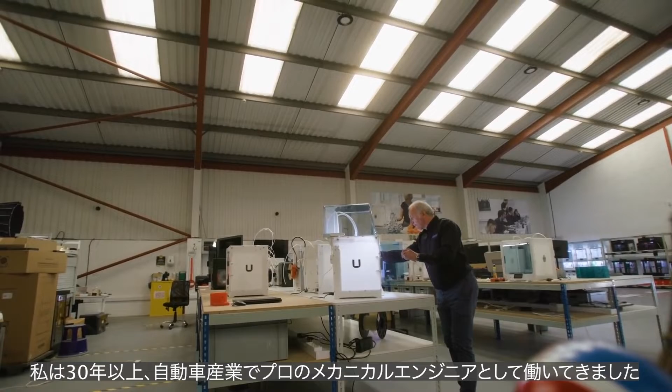Hi, I'm Steve Cox. I have my own company called AMFORi Consulting. My background is I worked as a professional mechanical engineer in the automotive industry for more than 30 years. But for the last 8 years, I've been involved with 3D printing and additive manufacturing. I spend time developing applications, showcasing methods of 3D printing, and helping clients adopt this technology. And one of the things I enjoy the most is exploring what this technology can do and how people can use it.

Ultimaker and the Ultimaker 2 that I bought 8 years ago really started me out on what I've heard called a walk in the woods with additive manufacturing and 3D printing. It still ranks as one of the best decisions I've ever made because it works straight out of the box and it allowed me to concentrate completely on applications rather than just making the technology work. In whatever I do, I'm always striving to achieve the best possible quality output, and I'm sure many of you are the same. But those attributes of quality always stood me in good stead.

So how do you create the best possible quality with the highest level of efficiency and the minimal amount of waste? It's something that I'm always keen to explore in the work that I do with 3D printing because I'm always wanting to present the best possible way of 3D printing to the clients that I work with. So that lean manufacturing mindset completely frames what I do now. I spend a lot of time when I'm designing and setting up 3D prints, and that often means spending time in the preview side of the slicing software to ensure that I know what kind of output I'm going to get and it's going to achieve the quality that I'm looking for.

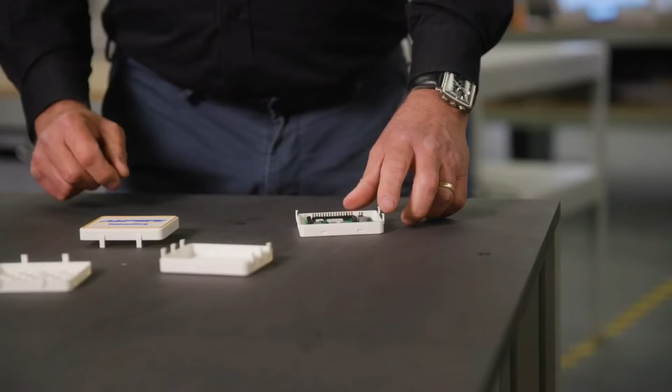Take as an example this design, which I've created using Autodesk's Fusion 360 and the new plastic design tools that they've just introduced into that software to make designing of injection molded parts more efficient. And those injection molded parts are the kind of thing that often use thin walls, clipping features and webs. In this example, the parts were designed around the rules for a 1.5mm injection molded plastic housing.

That 1.5mm wall thickness for these parts presents some issues when it comes to 3D printing. 1.5mm isn't an exact multiple of a 0.4mm nozzle, if that's what you're using. It's also not an exact multiple of a 0.6 or a 0.8mm nozzle either. But those inefficiencies are dealt with by Cura 5. In Cura 5, the introduction of variable line thickness deals with those inefficiencies of creating that 1.5mm wall thickness. That's done automatically by the software and no user input is required to create those variable line widths.

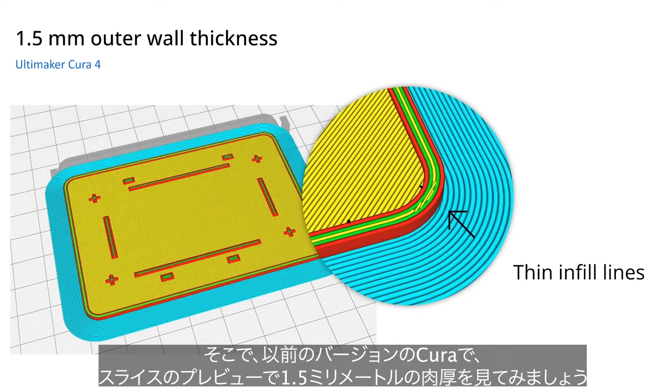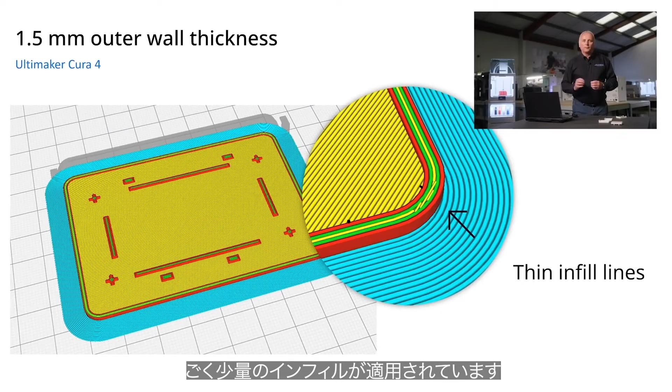So let's take a look at that 1.5mm wall thickness. In the preview of the slice in previous versions of Cura, you can see that that 1.5mm wall is created from 2 outer shells, 2 inner walls, and a very thin line of infill. And in the corners of the part, some very small amounts of infill applied. Is that really efficient? Is that really the best quality? Is that really going to give you the best possible 3D print?

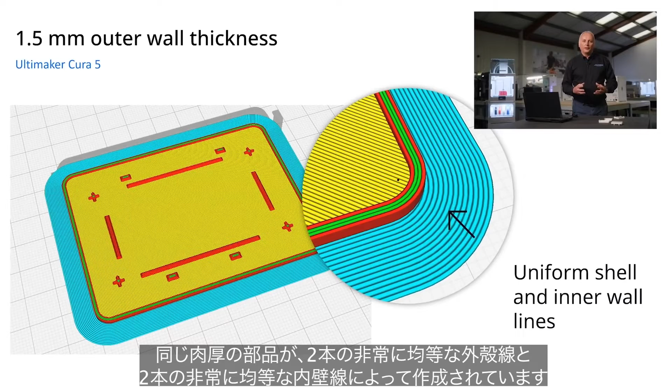Now let's compare that with the same part sliced with Cura 5. That same wall thickness now is being created by 2 very even outer shell lines and 2 very even inner wall lines. No thin infill, no messy condition in the corners.

That has to be much more efficient because we're talking there now about using 4 toolpaths instead of at least 5 in previous versions of Cura.

It's a similar story when we look at these small clip features that are holding the 2 parts of the housings together. Again, let's look at it in previous Cura. You can see that the clip is being created by an outer wall, an inner wall, and again, a small squirt of infill in the middle of the clip.

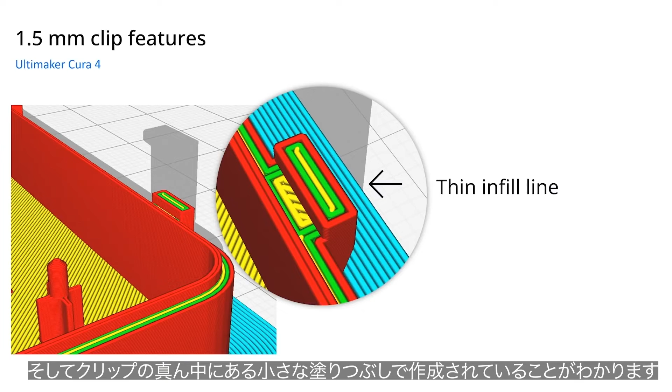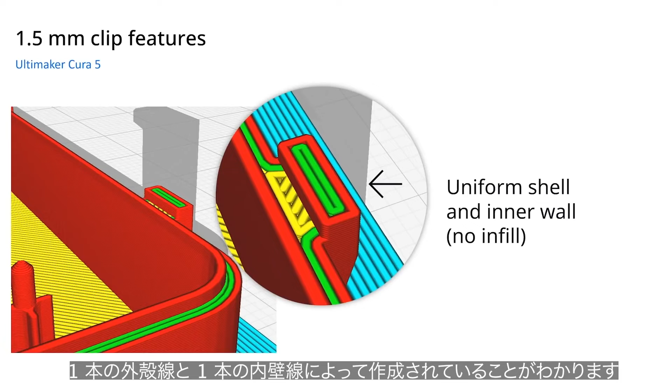Let's compare that to Cura 5. In Cura 5, you can see those same clip features being produced by using 1 single outer shell line and 1 single inner wall line. Again, those clips are now being created in a much more efficient manner.

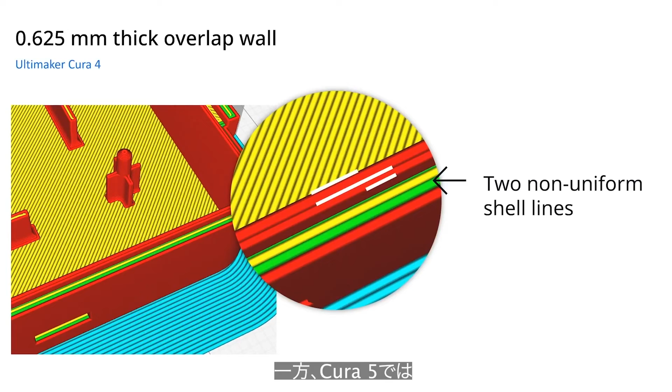So let's take a look how previous versions of Cura deal with that 0.625 millimeter wall thickness. You can see here it's doing it by creating two very uneven shell lines. Let's contrast that to Cura 5, where you can see that same wall thickness is being generated using a single shell line. That's one toolpath instead of the two toolpaths required in previous levels of Cura.

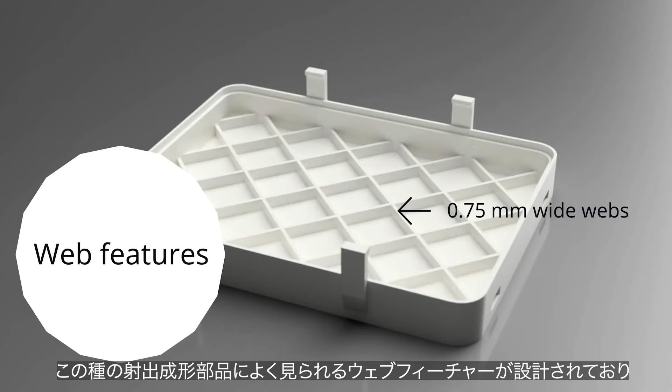The upper case half has web features designed into it, which are typical of injection moulded parts of this type to increase the stiffness of an open design such as this. In this case, those web features are 0.75 millimeters wide. And that's a rule that's driven by the injection moulding side of things, where you need a web thickness of half the main wall thickness to ensure that you don't get any visible sink marks on the outer surface of the part.

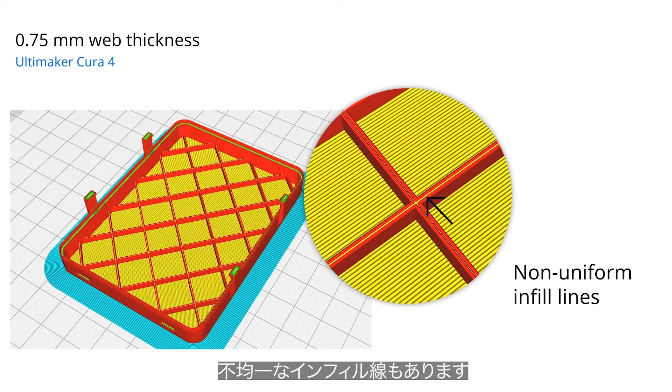So you can see here that previous levels of Cura create those webs using two uneven shell lines, and also there's some non-uniform infill lines going on that you can see in this preview image. Let's contrast that to Cura 5, where those webs are created using two even shell lines. Again, massively improving the efficiency of the 3D printing and also hopefully the quality. All of these improvements contribute to a better, cleaner, higher quality 3D print.

The efficiencies in toolpathing created by variable line width control bring about a significant reduction in 3D printing time. In this example, the print time using Cura 5 for the lower casing was 17% less than when the same part was sliced using Cura 4.13. And for the upper casing, the print time reduction was 15%. That's a really beneficial time improvement, and one that really fits well with my desire to create the most efficient 3D printing experience with the highest possible quality.

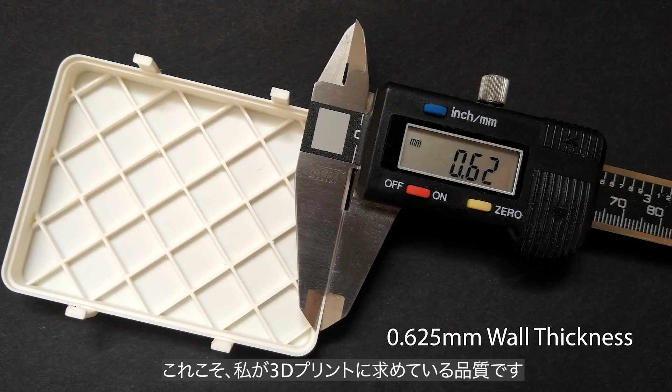Oh, remember that 0.625 millimeter wall thickness? How did that turn out? Well, let's take a look. That's pretty impressive. And that's the kind of quality that I'm looking for in the output from my 3D prints. So all of the things that we've seen in this presentation show how Cura 5 contributes to better quality printing with higher efficiency. That for me is a perfect combination.

And the great thing about Cura 5 is that it does this for everyone, not just for those people using Ultimaker machines. So you can see here that these parts were produced on an Ultimaker 3 that's 5 years old. Not the latest S5, not the latest S3. And that shows that Cura 5 delivers excellent results no matter what the age of your machine. I hope that's given you a really interesting insight into what you can expect from this very latest, exciting version of Ultimaker Cura.